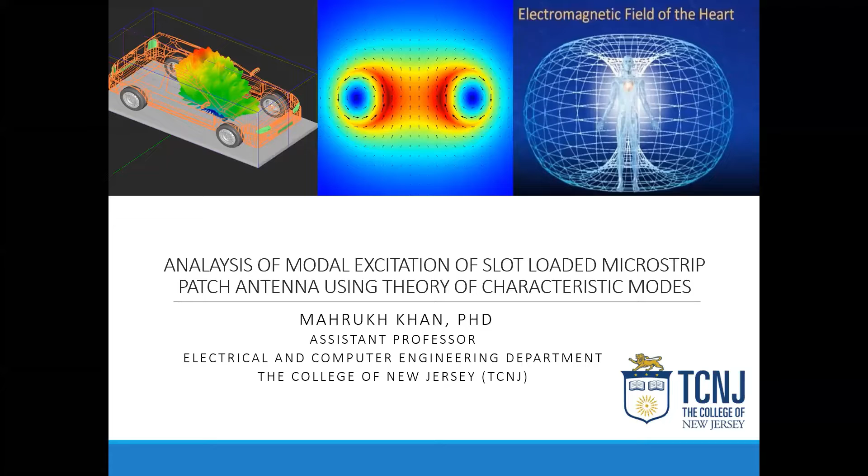So, hi everyone, my name is Mahrukh and I'm assistant professor in the electrical and computer engineering department at the College of New Jersey. The topic of my talk is analysis of modal excitation of slot-loaded microstrip antennas using theory of characteristic modes.

Before starting, I just want to introduce myself. So I recently joined the College of New Jersey as an assistant professor. Previously, I was working in MIDE, affiliated with University of Missouri, Kansas City as an assistant research professor. I did my PhD in 2017 with UMKC. I've been working for more than 4 years on characteristic modes. I started working on them during my PhD.

Today, in my talk, I will be talking about my recent paper that has been published in IEEE Transactions that is related to the modal excitation of wideband slot-loaded antennas. So when I was starting work on this problem, I had two questions in my mind. The first question was, can feed change the modal behavior of antenna structure? If yes, then can natural modes of antenna predict modal behavior after feed excitations? So I tried to address these two questions in my paper, and I will talk about them today as well, briefly.

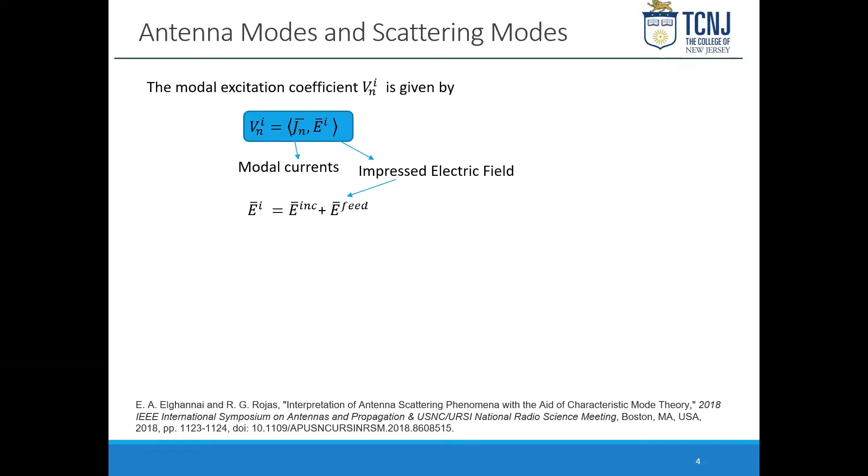So when I started my work, I found a very interesting paper by Dr. Rojas regarding antenna modes and scattering modes. As we all know, the modal excitation coefficient can be given by this expression, where Jn are the modal currents and EI is the impressed electric field. In this paper, they say the impressed electric field can be represented as E incident and E feed, where E incident is the field incident on the antenna, and E feed is the field induced at the antenna feed point. And then your modal excitation coefficient can become this.

They said that if your field induced at the antenna feed point is not equal to 0, then you are working with antenna modes. And when it is equal to 0, you're working with the scattering modes. So that's very interesting, I think, if we talk about excitation at the feed point.

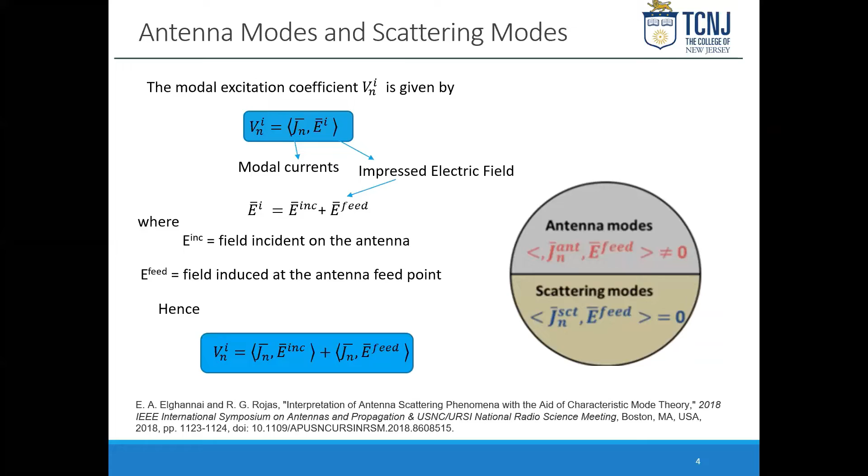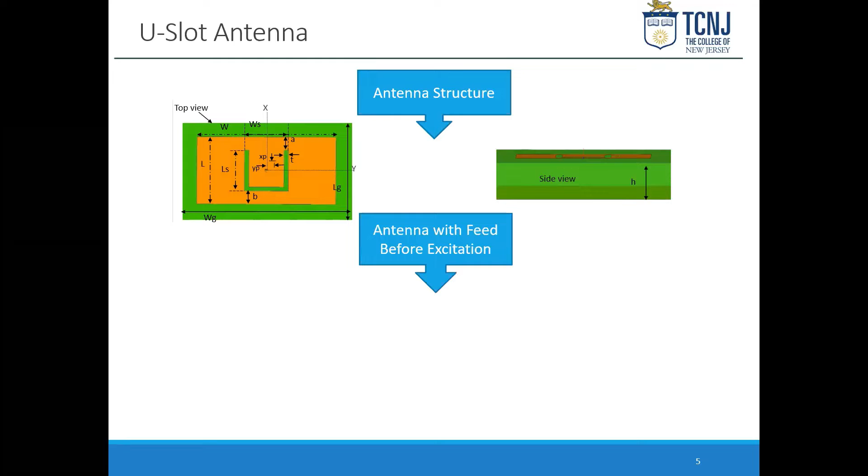So thinking about this, I actually divided my research in 3 parts. I was working on a U-slot antenna. One part is the antenna structure. The second part is the antenna with feed before excitation, when we introduce the feed structure in the antenna.

I actually explored 2 types of feed in this research: the straight probe feed and the L-probe feed. And the third part is, if I excite the feed, what will be the behavior? So I will try to address all 3 scenarios in this talk.

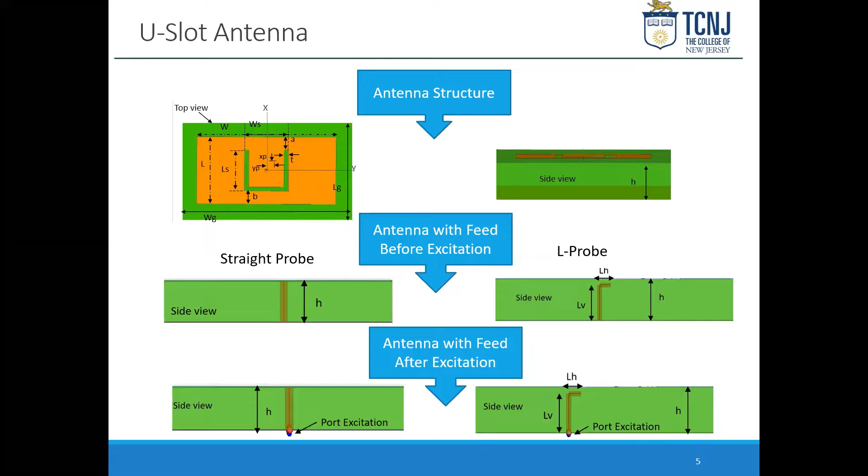First, if I talk about just the structure, as we all know, the total current distribution on the surface of the antenna is this expression, and total current can be represented as the summation of modal weighted coefficients and modal currents due to the patch. If I'm just talking about the structure, these are natural modes, because these are the modes created by the structure, just the antenna. And these modal currents will be the modal currents due to the patch.

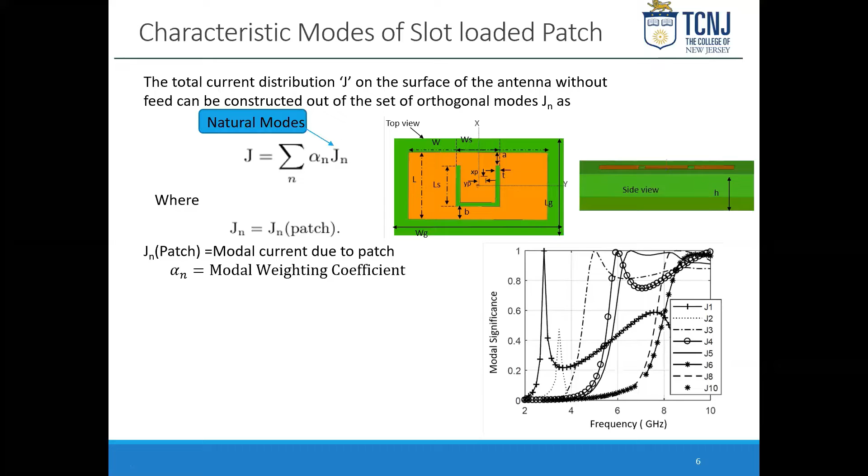So I looked at the modal significance of just the structure. I am looking into 10 modes, and you can see that some modes are narrowband modes and some modes are wideband modes. Like here, J1 is showing modal significance of 1, but it's a narrowband mode. Because we are talking about an ultra wideband antenna, the bandwidths of the modes are also very important.

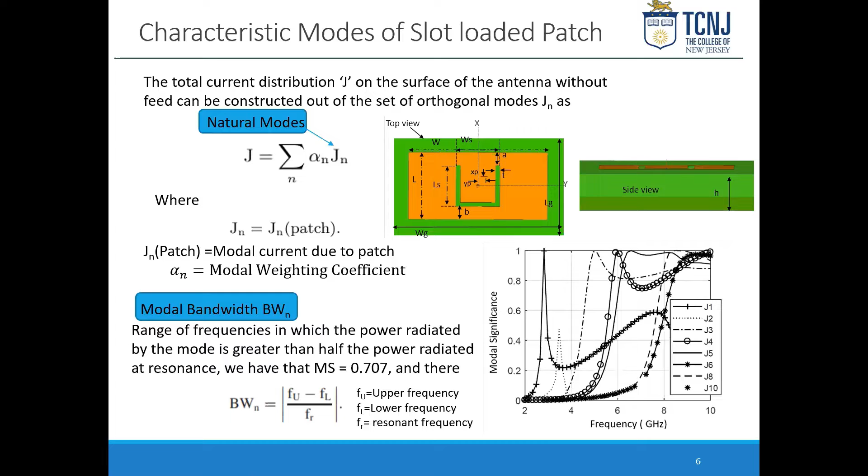We define the bandwidth of a mode as the frequency range between the upper and lower frequency where modal significance is 0.707. We can see that some of the modes are really wideband, like J5 here. And there are also higher order modes in this structure. So these are just the natural modes, the modes with just the structure.

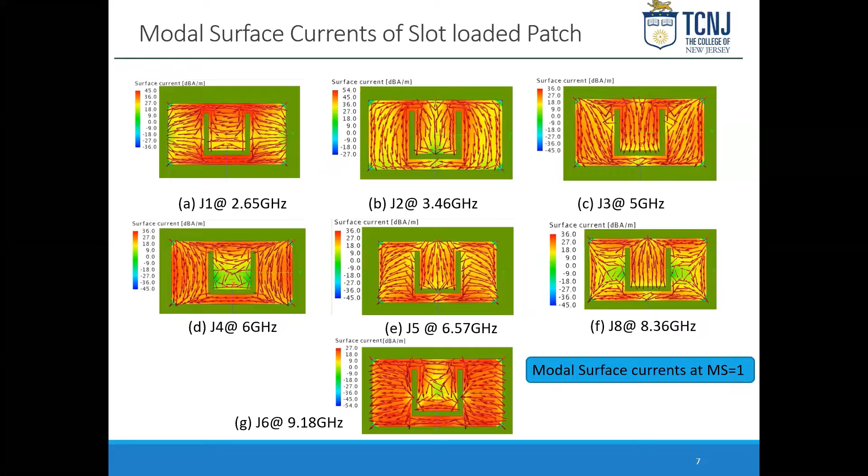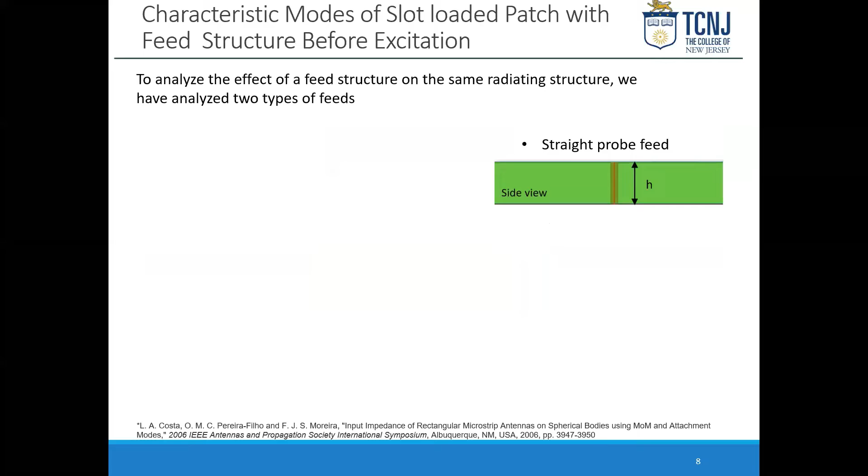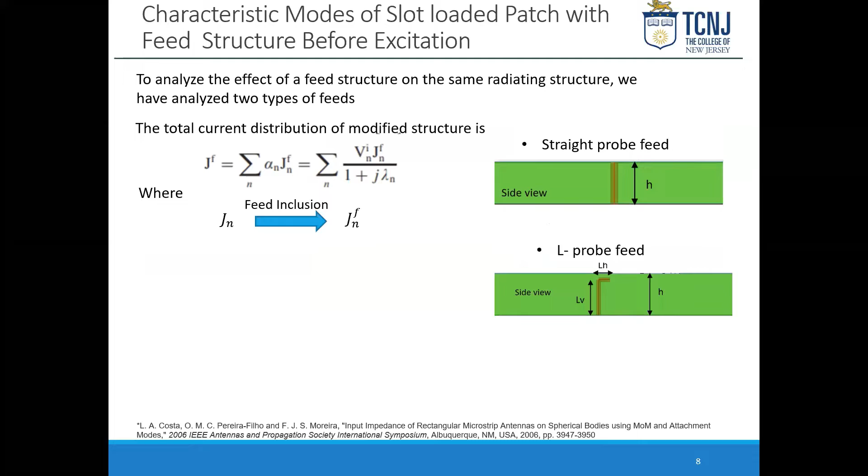So moving to the second part of my research, I'm saying let's introduce a feed structure into the U slot and see what will happen. When I introduce the feed structure, two types of feed I am addressing: the straight probe feed and the L probe feed. So now this structure is modified because of the introduction of the feed. So my modal currents, which were JN before, after the feed inclusion I can say that they are JNF because there is the feed in it.

Another paper I found very interesting was talking about the currents, saying that the total current is the summation of the currents due to the patch and then the feed. So the modal current due to the patch, which I defined before when I was talking about natural modes, and then the modal current due to the feed. So my total JN is the combination of both the currents. So that's another interesting aspect of the feed structure.

Then if we think about the paper that we were previously talking about, the modal excitation coefficient is the combination of the field due to the incident field and the field due to the feed. But right now, I'm not exciting my feed yet, so this is 0. So my modal excitation coefficient before excitation is just due to the incident field, or it's just a scattering mode I am operating on.

So now if I think about just the feed, let's consider the inactive feed. Inactive feed means that we have the feed in the structure, but we have not excited it. And we see that our natural modes, the A figure, our modal significance, are changed due to the feed structures. If we see the straight probe feed, we can see that there are some higher order modes there, but also our J3 is a little bit changed. It becomes a little bit narrow.

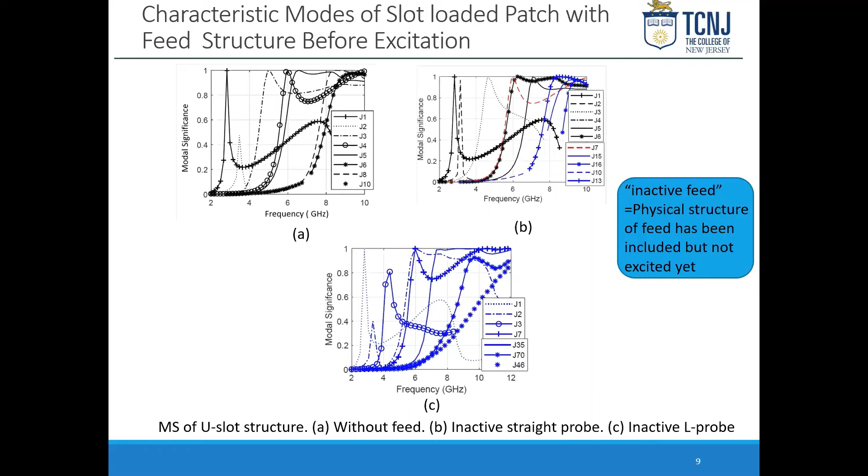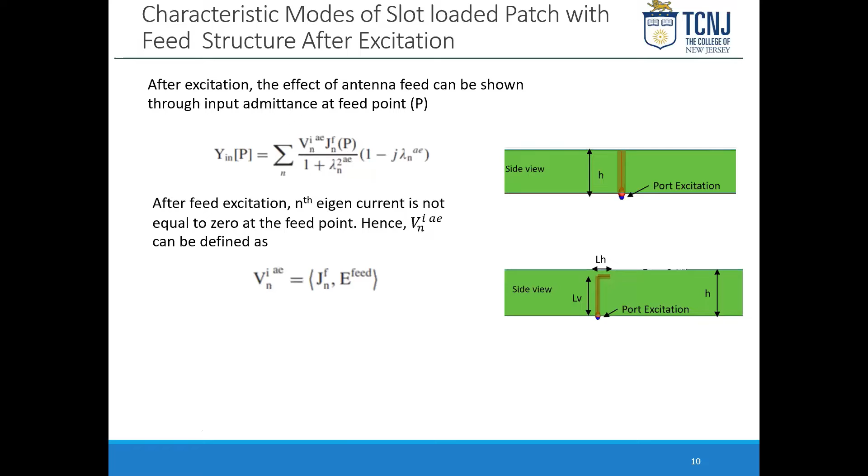Thinking about this, now I will move towards the third part. What will happen if I excite my feed? After excitation, the effect of the antenna feed point can be represented by its input admittance. And because our feed point electric field is not equal to 0, after excitation our modal excitation vector will be this. So now I am talking about the feed with the excitation. Moving to my analysis, if I just think about the straight probe feed, after excitation these are my modal significance plots of the straight probe fed U-slot antenna.

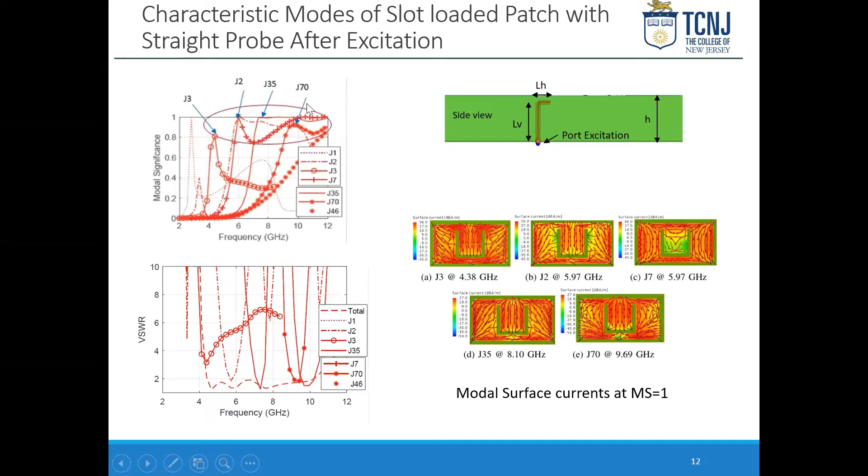Now, if I move towards the L probe, there are, of course, a higher number of modes, because we were seeing a very, very wide bandwidth with the L probe. So more modes participated in the bandwidth. We can see here that one of the modes was J7, which canceled each other, so it is not participating in the bandwidth, but all the other modes are participating in the bandwidth, like J3, J2, J35, and J70.

And another interesting aspect: because this is an electromagnetically coupled port, you are not seeing any contact here. You're not seeing any current emerging from there or going there. So it's because of the L probe feed.

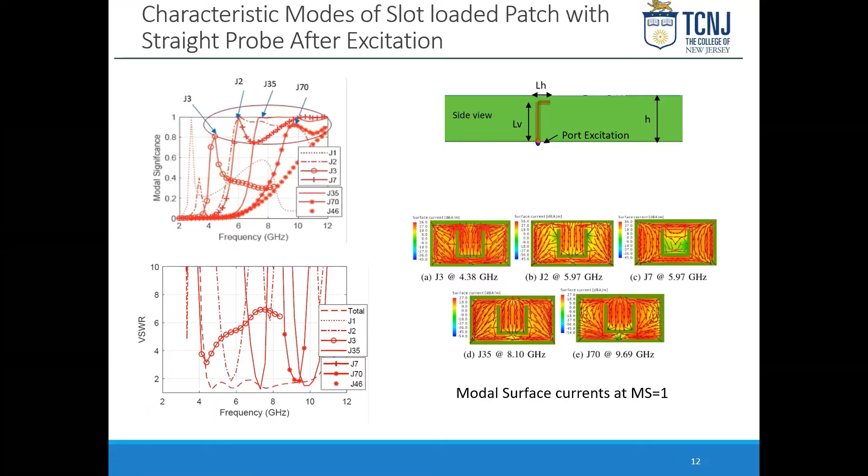So after doing the analysis of both types of feed, if I summarize this scenario, what I found is that, due to the straight probe feed, these are the natural modes that were excited initially. They participated in the modal significance for the straight probe feed and for the L probe feed. They were excited, like J1, J3, and J6. Similarly, in the L probe feed, 3 modes were excited: J1, J2, and J3.

But if you see now the modes that contribute to the bandwidth, they were even fewer. J3 and J6 contributed to the total bandwidth, and J2 and J3 contributed to the total bandwidth. We were, of course, seeing a very, very large bandwidth with the L probe. So it means that of the modes of the structure that we found using modal significance without the feed, some initial modes were there, but there were some new modes that contributed to the bandwidth. So a few natural modes participated, but there were some new modes. So the feed is playing a very, very important role in the modal characterization of the antenna.

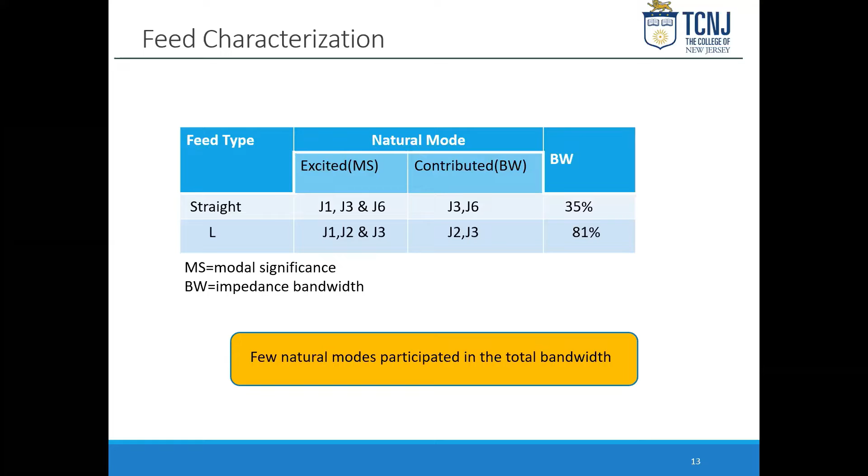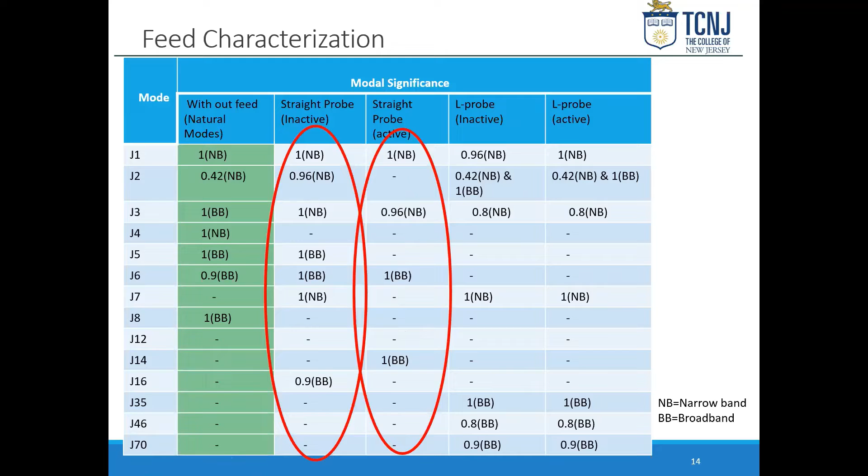So in the straight feed, when it was inactive and when it was active, meaning when it was excited, we can see that some of the modes are not there and some of the modes were there. So what I found is that the modal significance due to the straight probe when it was inactive and the modes that were radiated when it was active were not equal to each other. There were some new modes, and there were some modes that were absent. So what I found is that the modal eigenvalues are not equal.

Now, for the L-probe feed when it was inactive, you can see that the modes are almost similar to the L-probe mode when it was inactive and active. So they both were the same. So we can say that the modal eigenvalues for the L-probe feed after excitation are equal to the modal eigenvalues before excitation. So that's a very interesting result.

I think that the attachment mode due to the straight probe feed plays an important role in this case, because we can see that before excitation and after excitation, our modes have been changed. So that's, I think, a very important result to know when we predict our modes by putting the feed in it: if it is a feed that is touching the conducting patch, then your modes can be different that will participate in the bandwidth.

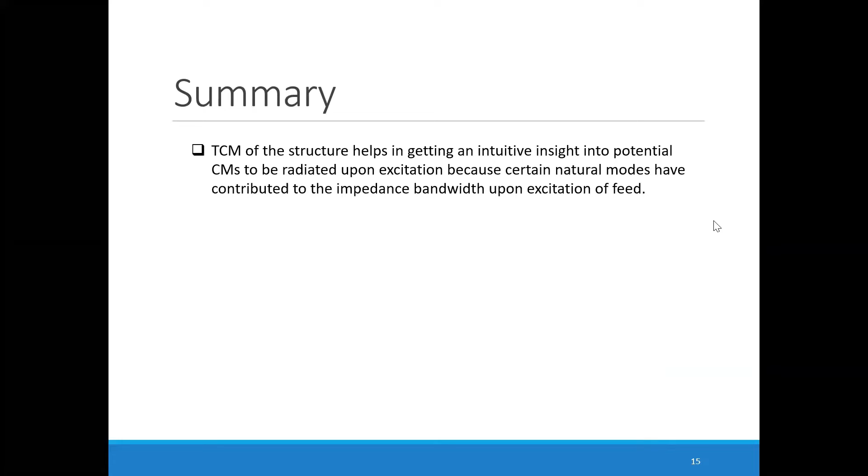So if I summarize this, I can say that the natural modes give us intuitive insight, but the feed excitation plays a very, very important role in the impedance bandwidth. And we can also say that you can predict, using an inactive L-probe feed, the modal behavior of the L-probe feed antenna, but you cannot predict with the straight probe feed excitation the antenna's modal behavior. So it's very important to see that as well.

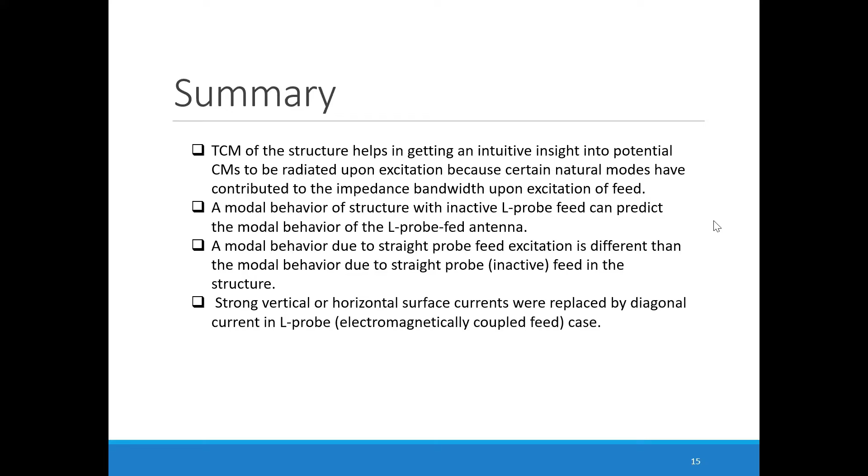Another thing is that we said we can see more of the diagonal currents in the L-probe because, of course, higher order modes were excited and it was a large bandwidth. And another thing we are saying is that the current modes which were canceling each other did not take part in the impedance bandwidth. That's about it. If you have any questions, I hope I was not too fast.

Thank you, Mahrukh, for your speech. Are there any questions? I had a question. Yes, please. So thank you for your nice presentation.

I had one question: you showed the eigenvalues of the straight probe in active and inactive scenarios are different. And I think this can be described by the impedance of the feeding, because when you're in active mode, your feeding is 50 ohm. And when you're in inactive mode, you basically have a short circuit, you're shorting the feed. So that's why the eigenvalues of these two structures are different. So do you think this is the reason for the different eigenvalues, or is there another reason?

I feel the thing you're talking about is the same as for the L-probe, right? For the L-probe, we are not directly connecting this capacitive feeding to the structure. So maybe we cannot see so much effect of this 50 ohm or short circuit. But in the case of a straight probe, maybe this effect is more severe.

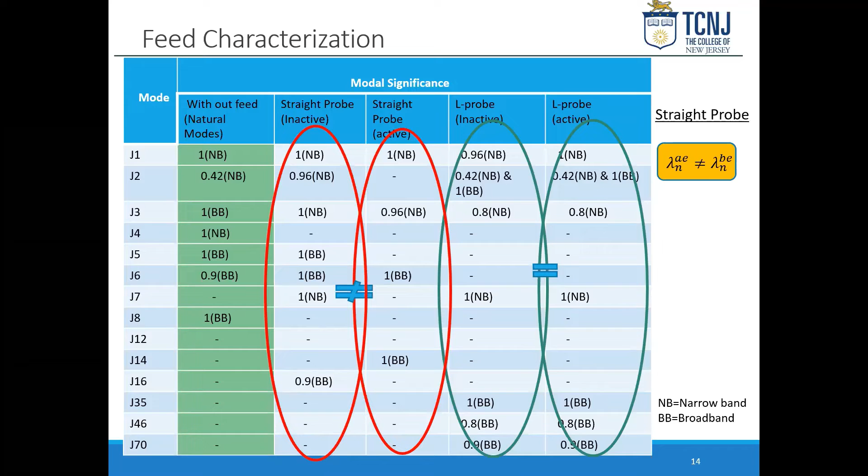So my name is Jaime Molins. I'm a PhD student from the Politècnica University of Valencia. And my presentation is entitled Design Procedure for 5G IoT Multiple Port Cavity-Backed Antenna. First of all, I would like to thank my advisors, Eva Antonino, Marta Cabedo, and Miguel Ferrando for their support in my thesis.

So they will range from 600 megahertz up to 6 gigs or so. The reason behind that is that there are already a lot of applications working on that bands. So also from the 2G, 3G or 4G communication systems, there's already a deployed infrastructure. So it will be easier for the 5G to be deployed on that frequency and not in the millimeter waves that are still under research.

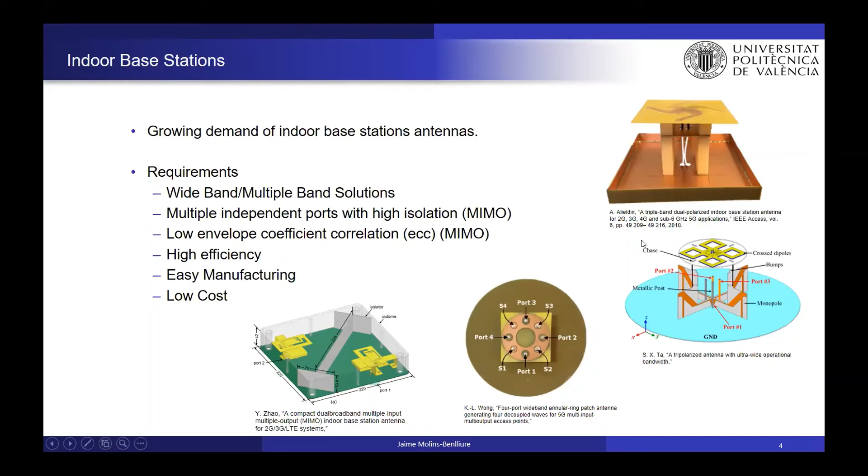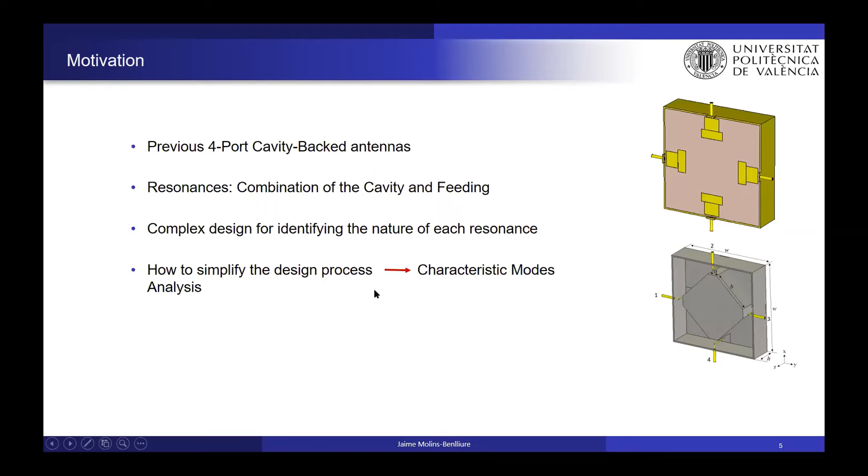So the motivation of this presentation is we have been previously working with 4-port cavity-backed antennas. Like this one, for example, here we have a cavity. It is fed with 4 T-shaped monopoles, and this one is fed with 4 L-shaped monopoles. The problem of this design is that the resonances are a combination of the cavity and the feeding. And then when you do the analysis, it's difficult to identify the nature of each resonance. So we would like to simplify this design process, and we would like to do the characteristic mode analysis.

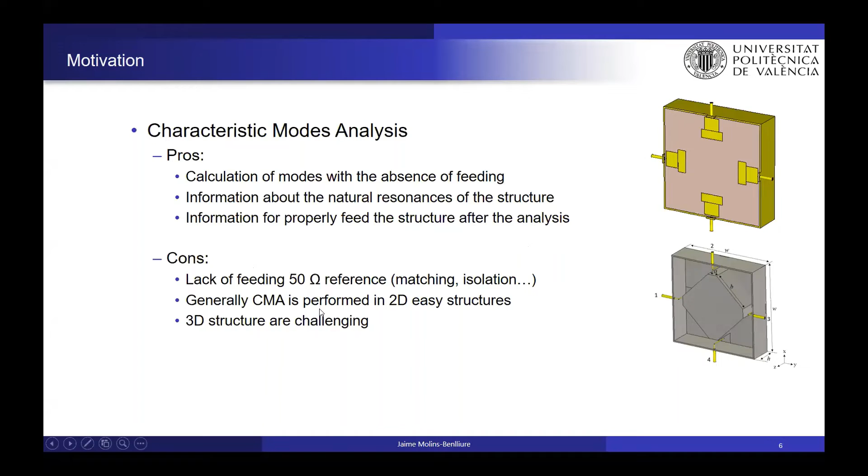Okay, so about the pros and cons of the characteristic mode analysis. About the pros, it calculates modes in the absence of feeding, and this information is good for getting information about the natural resonances of the structure. So then with that information, you can properly design the feed. About the cons, you lack the feeding impedance references, so you cannot get proper matching and isolation between feeds. Generally, the characteristic mode analysis is performed in 2D and canonic structures. In this case, we are going to perform it in 3D structures, so it's going to be quite challenging.

So the strategy we are going to follow is, first of all, we will do the characteristic mode analysis of the backing, in this case the cavity. And then with this information, we will design the feeding, and we will do a full wave analysis in order to get the feeding information. So the goal in this case is not to present a really optimized design. It is more about presenting a simple procedure for understanding and designing a complex cavity-backed design.

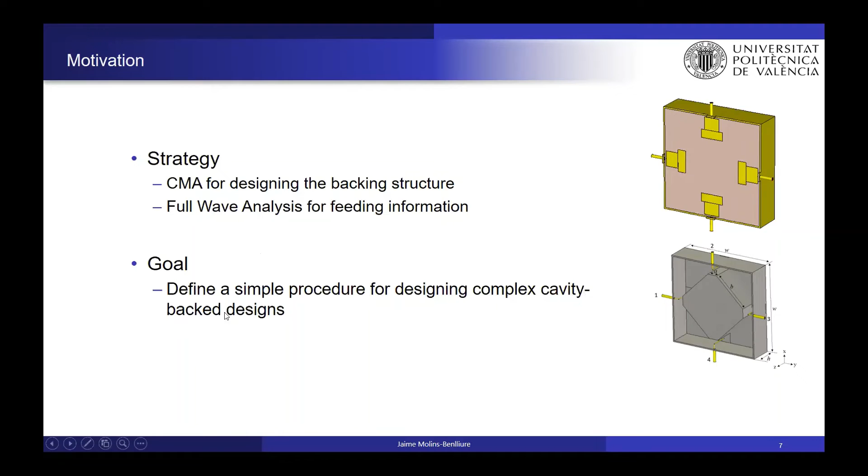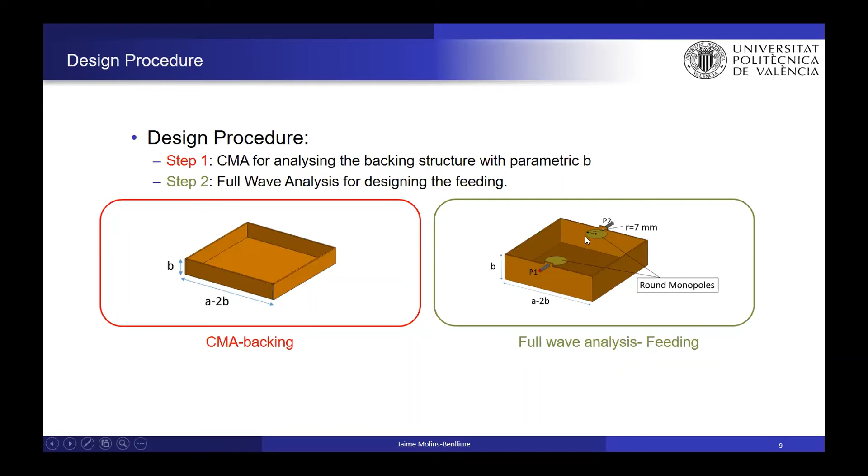Okay, so let's move to the design procedure. As I said, we have 2 steps for designing. The first step will be focused on the characteristic mode analysis of the backing of the structure. We're going to do a parametric study with B, checking how the modes change when B is decreased or increased, in this case from 0 to 25. And when the characteristic mode analysis is done, we will place the feedings and do the full wave analysis.

Okay, talking about the first step, as I said, we will do the characteristic mode analysis of this cavity, and we are going to set A, which is this distance, to 100 millimeters for this analysis. And then we're going to shift B from 0 up to 25. It is really important to notice that when B is equal to 0, this cavity becomes a square ground plane. Why is this so important?

It is important because, for people who are familiar with modes, the modes of the square ground plane are well known and well studied. So it will be a perfect initial point in order to check how the modes of this ground plane change when B is step by step increased. So we will check how the modes change.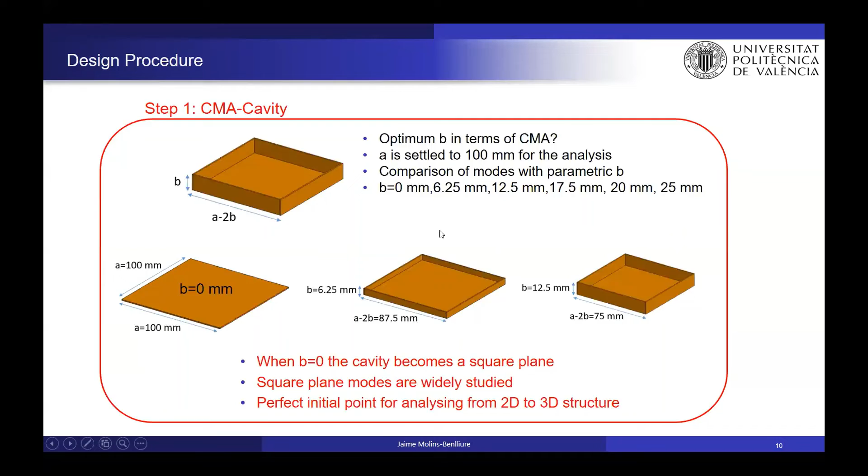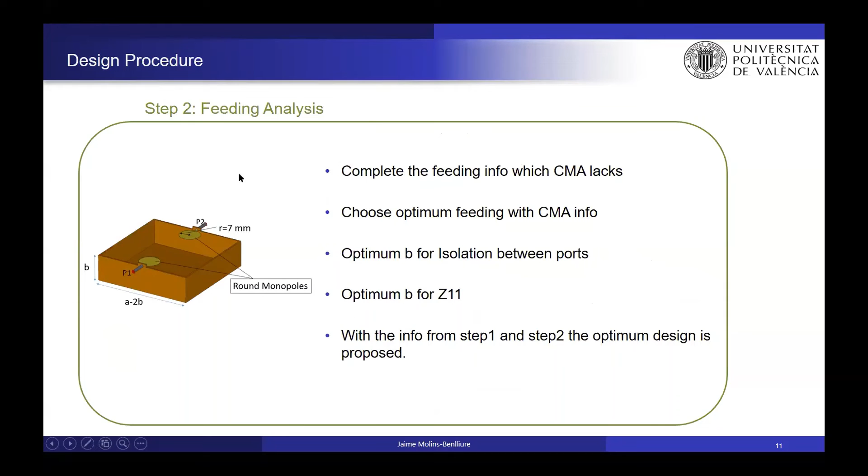So then, talking about the second step, we will complete the information we gather in the characteristic mode analysis with the feeding information. With the information of the previous step, we will choose the optimum feeding, and then we will repeat the analysis for finding the optimum B in terms of isolation between ports and optimum input impedance. So finally, when we get together the information from step 1 and step 2, we will propose an optimum design.

Okay, let's move to the characteristic mode analysis. Before we continue, I would like to briefly introduce the theory of characteristic modes. It provides a set of currents on an arbitrary structure, and it gives a physical interpretation of the radiation mechanisms of the structure. So it will help to determine which kind of feeding is optimum in your configuration.

Characteristic modes are obtained by solving this eigenvalue problem. We use the generalized impedance matrix. Here we have the imaginary part and the real part, and it is calculated using the method of moments. With that, we can calculate the eigenvectors and eigenvalues. The eigenvalues give really useful information about the resonance of the associated modes.

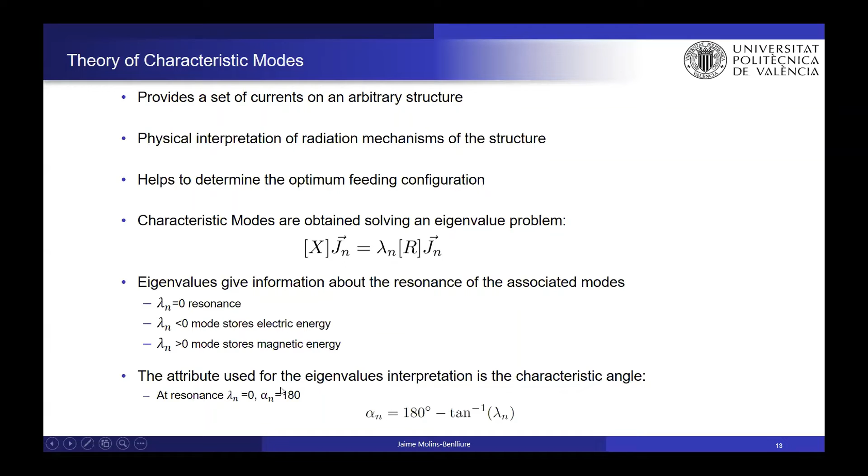When the eigenvalue is equal to 0, the mode is at resonance. When the eigenvalue is lower than 0, the mode stores electric energy. And when the eigenvalue is higher than 0, the mode stores magnetic energy. The attribute we are going to use in this presentation is the characteristic angle. What we need to know is that at resonance, when the eigenvalue is 0, the characteristic angle is 180.

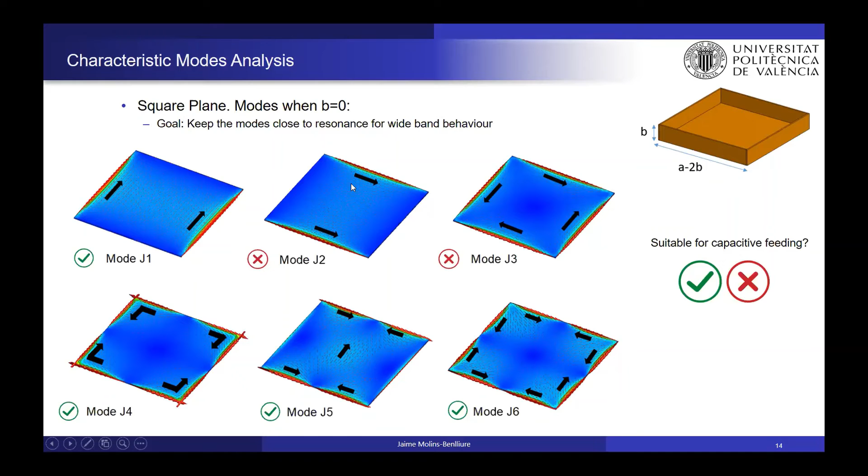So what we are going to do now is to capacitively feed this cavity. To capacitively feed an antenna or the cavity, we need a minimum of current. So which modes are going to be excited? We check the minimum of current. Modes 1, 4, 5, and 6 will be excited with a capacitive feeding because they have a minimum here where we are going to place our monopole. Modes 2 and 3 will not be excited.

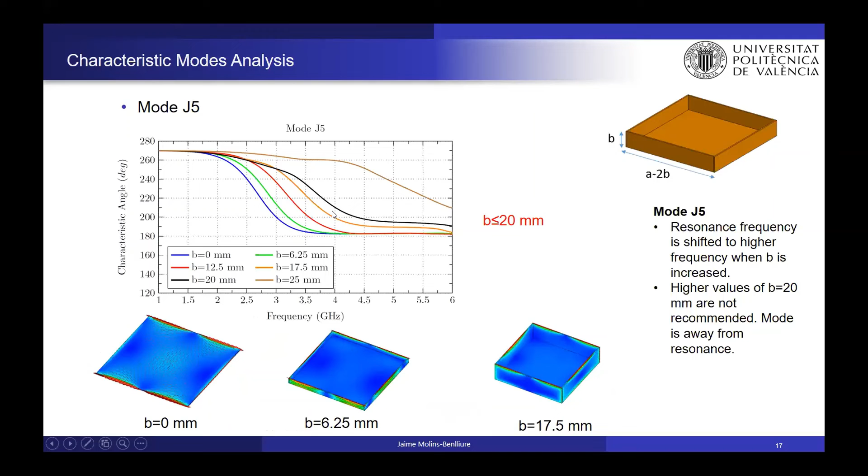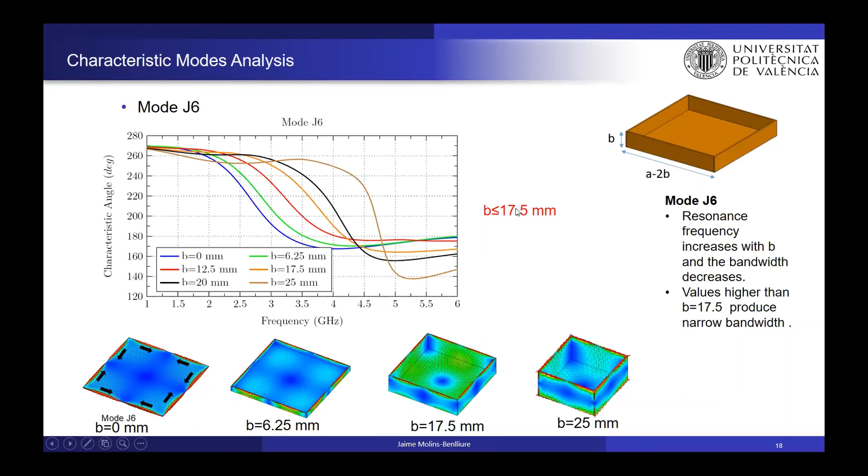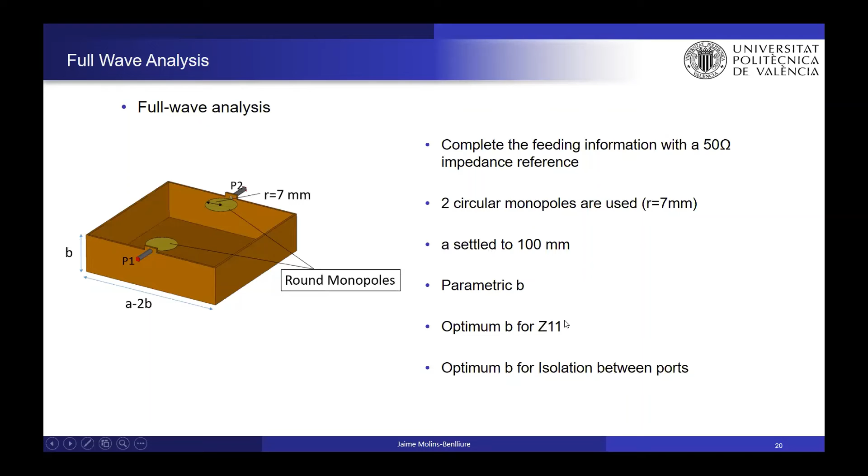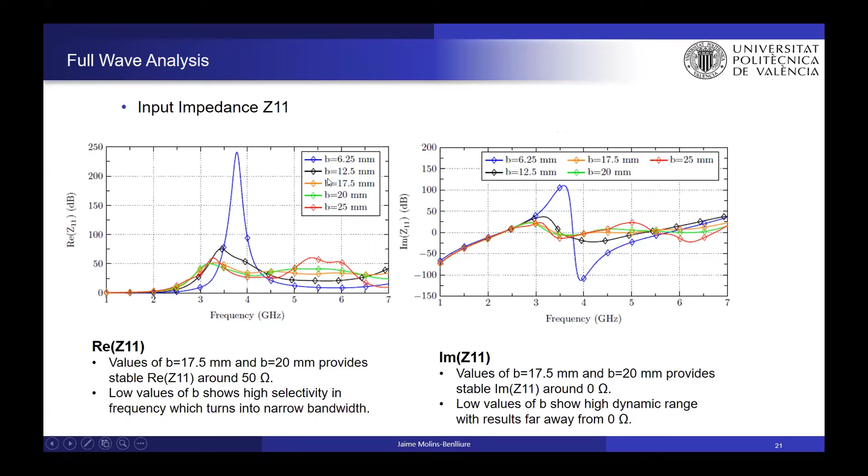So we have to increase it a bit in order to have a flatter response, or to have values closer to 50 ohms in real part, or to 0 ohms in imaginary part. So the best results are obtained when B is in between 17.5 and 20. The orange and the green curves, you can check that they are close to 50 ohms and close to 0 ohms in the imaginary part. And when it is increased, it goes back to have a bigger dynamic range. So it is better to stay in terms of matching in between 17.5 and 20 millimeters.

In terms of isolation, it is easy to identify that when B is increased, the distance between the monopoles is decreased. So the isolation will decrease also. So if we want to have a minimum value of isolation of 15 dBs, we can check that for B higher than 20, the isolation will be lower. So we have to respect that value of B of 20 millimeters, and it should be lower than 20 millimeters if we want a minimum isolation of 15 dBs.

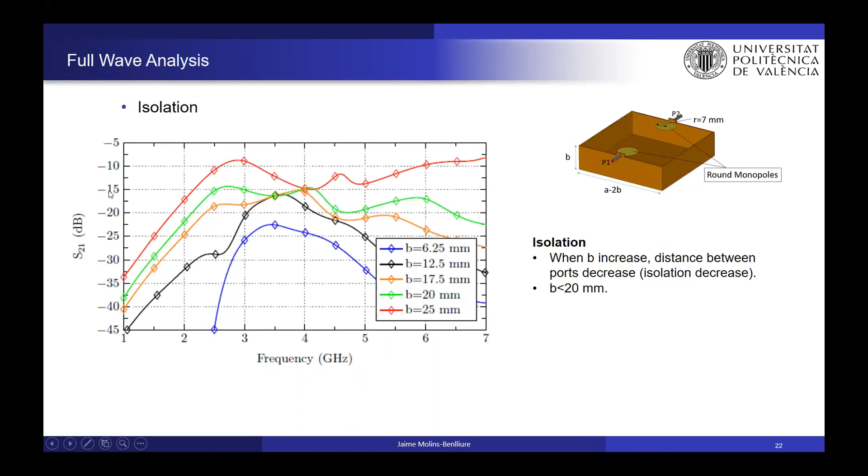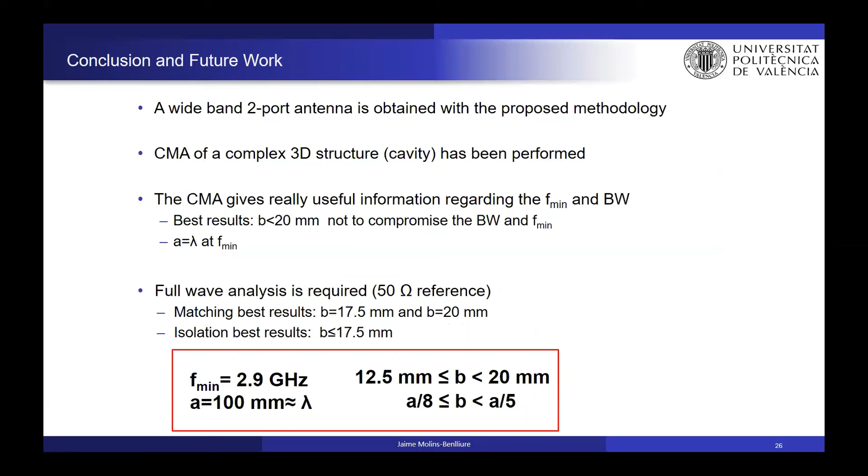I have a question. So I saw that you did the modal analysis with the cavity. But do you know what effect the cavity is having on the antenna, or is the antenna actually part of the cavity here? Yeah. Did you do the modal analysis of just that, like the circle? We did the modal analysis just of the cavity. Oh, okay. Not with the antenna. Yes, just checking the potential of the cavity in order to be fed, not all together.

Maybe this could be continued in further studies, but just the cavity in order to check, when B is changed, the potential bandwidth we could achieve, but not as a whole yet. Okay. Okay, thank you.

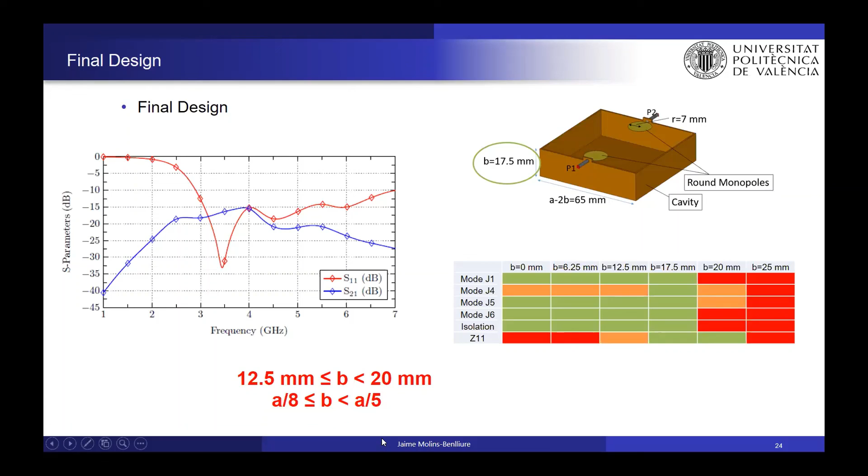I might have a question, Jaime. How does it compare to cavity modes, like if you close the cavity? Did you have an analysis about this? Can you tell us a little bit? It's something we didn't do, but it could be interesting to do the correlation between the characteristic modes and the cavity modes. But I cannot give you more information because we didn't do it.

We should be analyzing, like placing two cavities together and doing the analysis. But we didn't do it yet. So I will take it into account for a future simulation in order to see the correlation. Thank you. Indeed, it would be interesting because in the cavity we have 3D fields. We don't only have the current mode. So that's 3D fields, that's true.

That can probably help you. So you have another degree of freedom actually. So you can place it kind of everywhere. Yeah, I agree. That could be really interesting. It is true. Thank you.